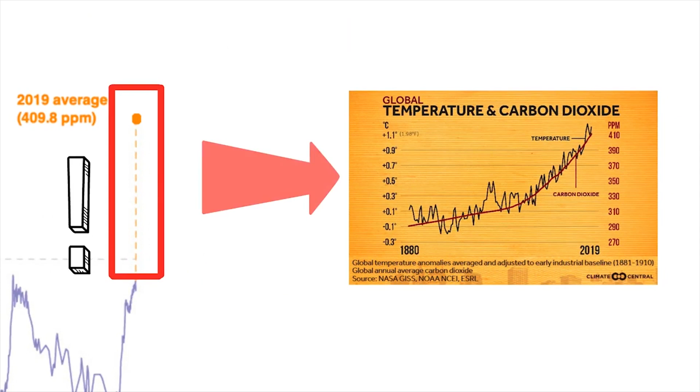Rising CO2 levels have been correlating closely with rising global temperatures since 1880. This graph shows rising CO2 levels on a shorter timescale as measured at the Mauna Loa Observatory in Hawaii.

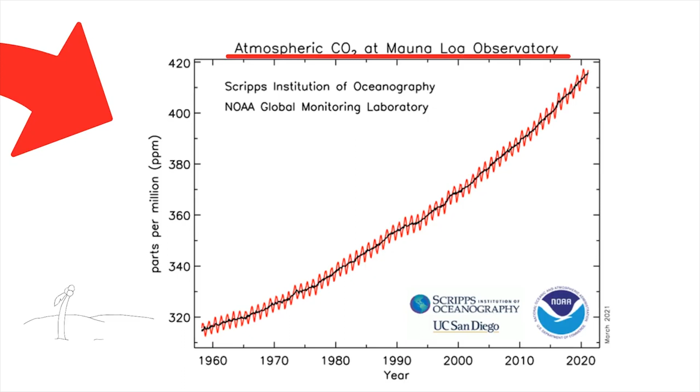On an even shorter timescale, you can see average CO2 levels have continued to rise despite a global economic slowdown from the coronavirus pandemic, shown by the black line. The red line on this graph shows the seasonal variations.

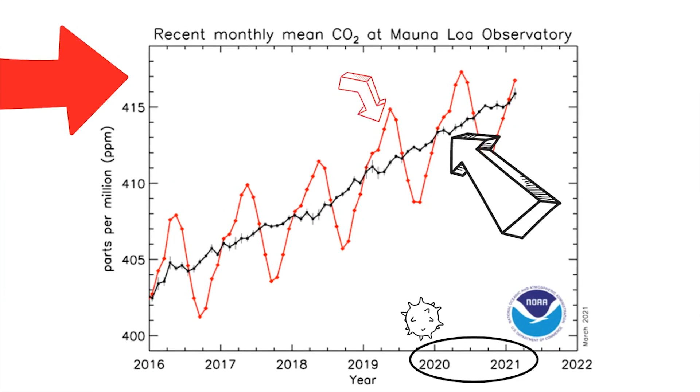Fortunately, there is now a proven breakthrough technology that captures 100% of the CO2 created when generating power from fuels such as natural gas, biogas from landfills, syngas from coal, and diesel fuel. It is called the Allam-Fetvedt cycle, or simply the Allam cycle.

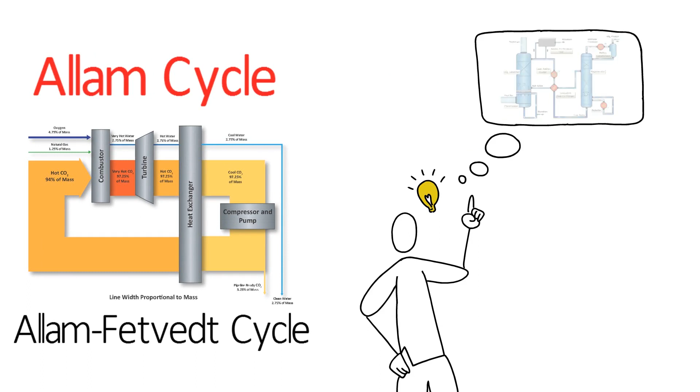In addition, there are carbon capture technologies such as Shell's CANSOLVE CO2 capture system that can be added to existing power plants. The captured CO2 can be utilized for a wide range of uses, including vertical farming, as well as being sequestered in the ground.

Shown next is a short animated video segment that illustrates how the Allam cycle works.

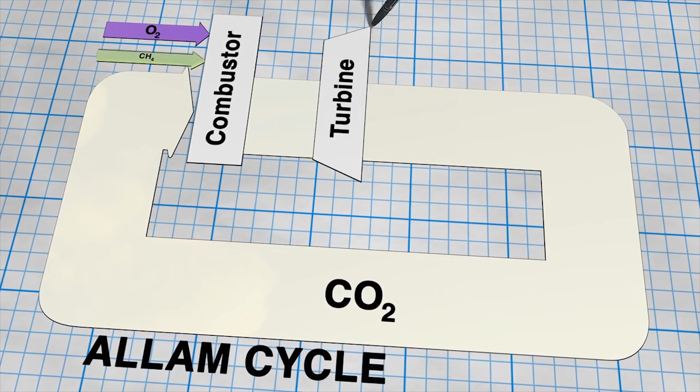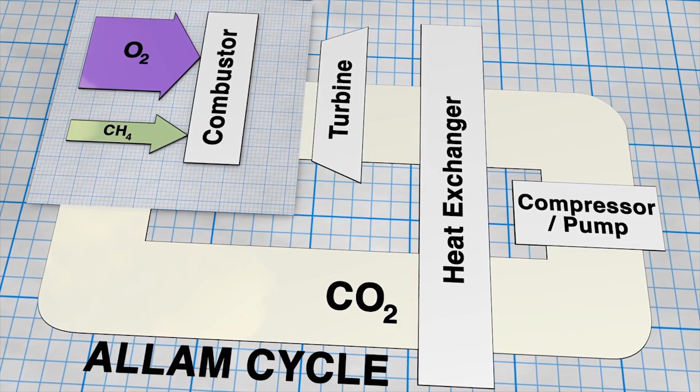Net Power uses supercritical CO2 instead of steam to produce power. Natural gas is combusted with hot, recuperated CO2 and oxygen, preventing NOx production. Burning with oxygen, known as oxycombustion, is typically uneconomic because oxygen is expensive to produce. Net Power overcomes this problem by recuperating the majority of the produced CO2 into the combustor, dramatically lowering oxygen requirements.

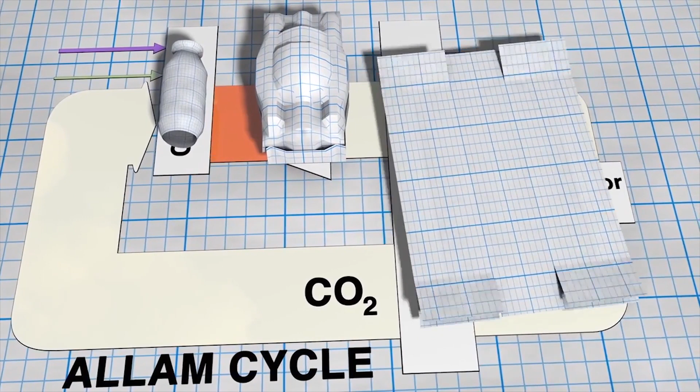The resulting working fluid of high-pressure CO2 and water is expanded through a turbine and then cooled in a heat exchanger. Water is removed, and the remaining nearly pure carbon dioxide stream is compressed and pumped back to high pressure. Excess pipeline-ready CO2 is exported before the working fluid is reheated in the heat exchanger and returned to the combustor.

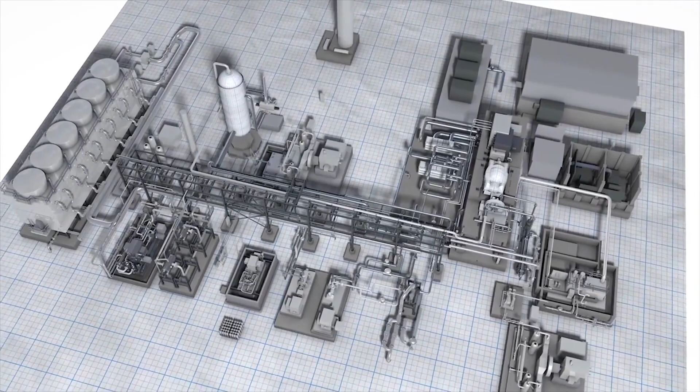This breakthrough process produces low-cost electricity, eliminates water consumption, and is emissions-free.

Shell's CANSOLV CO2 capture system can be added to existing power plants to enable carbon capture on a large scale, and is already in use in many locations.

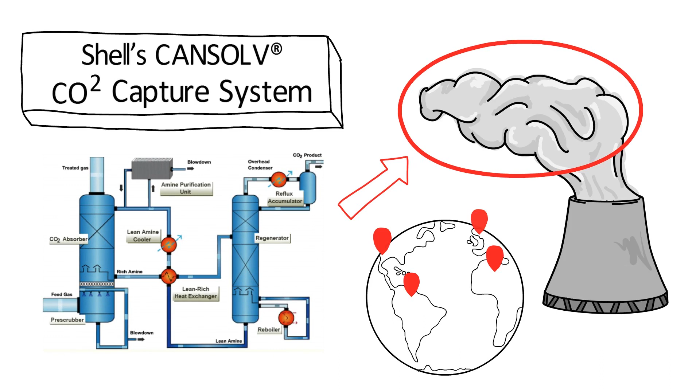Since the Allam cycle technology is very energy efficient, using it when building new power plants is often the most cost-effective approach. Both these solutions enable several different sectors of the economy to work together to benefit the whole of society. Capturing carbon through these technologies allows oil, gas, and power plant workers to continue working.

As well, it helps governments and companies that depend on income from fossil fuels to transition to a low-carbon economy, which is critical for obtaining their support for this transition.

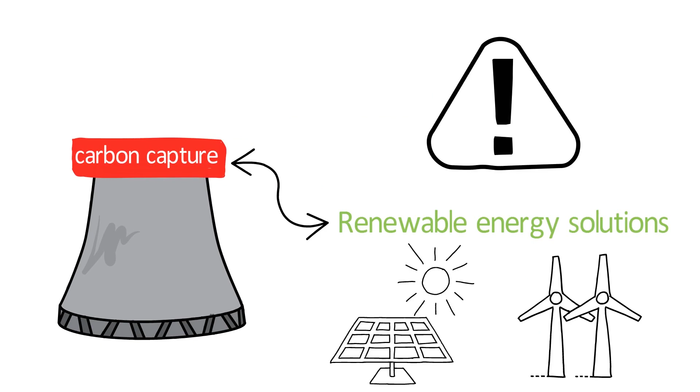Power plants with carbon capture are complementary to renewable energy solutions. Due to the urgent need for large-scale climate action, all these solutions can and should be implemented around the world as quickly as possible. Thank you for taking the time to view this video.